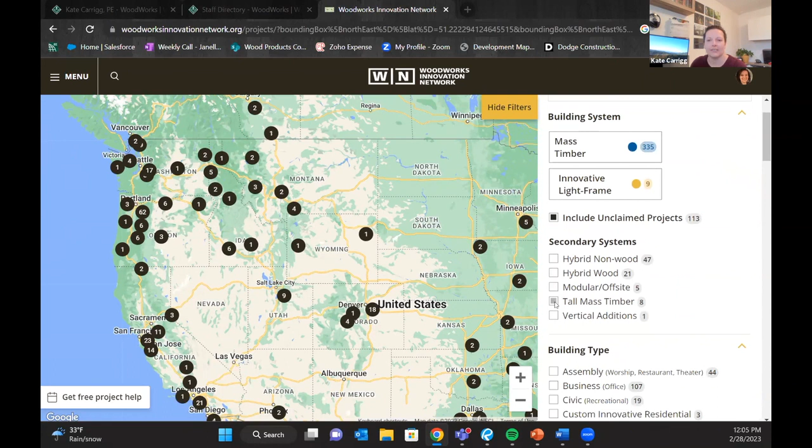You can actually filter this website by a bunch of different categories, including tall mass timber. And you can see where these projects are. You can access the projects by either clicking on the pins, or you can select them from the list. So today we will be talking about TimberView. You can find TimberView's projects. This is information that the team has compiled about this project on the WIN network.

And you can also find the team members themselves. If you want to look closer at the team, the members that are part of the WIN network have profiles and you can contact them directly. Because again, the point of this is to just foster networking within this community. So this is a really great tool if you're an experienced professional and you want to gain more exposure. And it's also great if you are new to mass timber or you're starting a mass timber project and you're trying to look for more information or to assemble a project team.

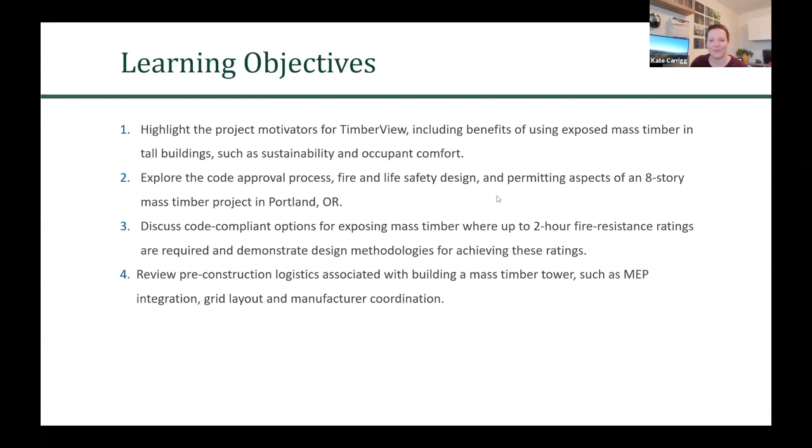I'm not going to read all of the learning objectives to you, but I'm happy to send you that information if you want it. We will be talking about prescriptive design, specifically the International Building Code, which is updated on a 3-year basis. We're currently in the 2021 IBC, and mass timber first occurred back in the 2015 IBC.

But back then it was only recognized as an acceptable product that you could use in any of the wood frame construction types that were in the code at the time. So we could only build about 4 or 5 stories, maybe 6, if you did everything right and had an occupancy that allowed for that.

Despite those limits, though, there was still a lot of interest in going taller back in 2015. We were seeing all these tall buildings appear over in Europe, overseas, and up in Canada. There was also a competition held by the USDA and Softwood Lumber Board here in the United States to help spur more research and more interest in these tall wood building types.

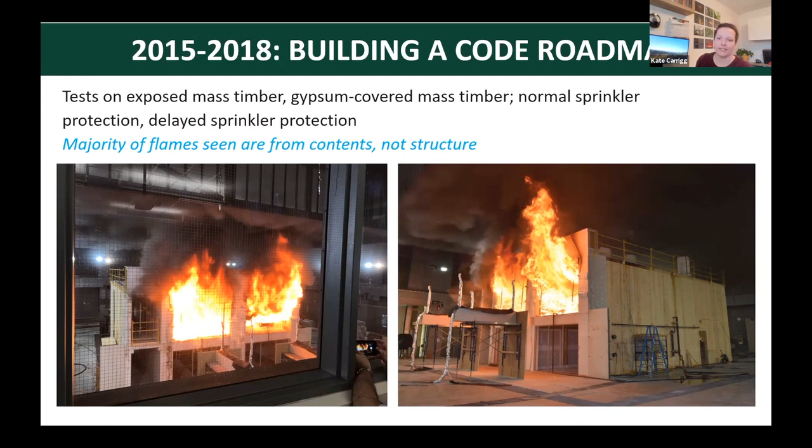They used the results of those tests, along with any other research done up to that point, to develop 3 new construction types. The main differences between these 3 new construction types are the fire resistance ratings required for structural members as well as non-structural members, and the amount of timber you're allowed to expose.

These are all mass timber buildings, ranging from 85 feet or 9 stories up to 270 feet or 18 stories tall for the tallest construction type, which is 4A construction. For C construction, you're allowed to fully expose all of the timber on your ceilings and walls. For A construction, everything has to be concealed.

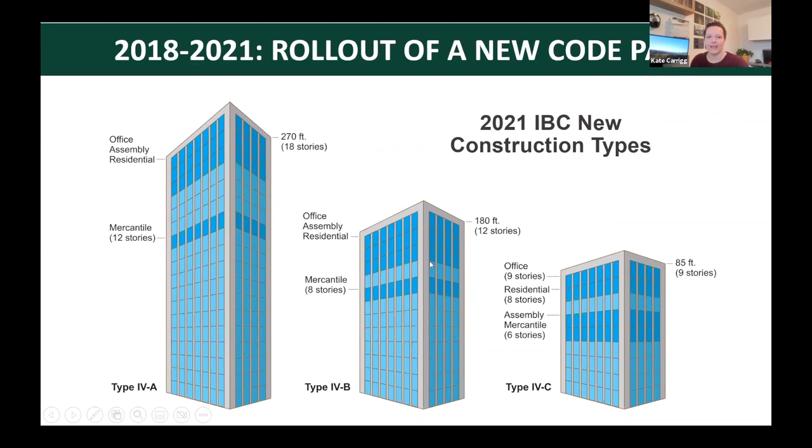B construction is a little unique because they have limits as to how much timber you're actually allowed to expose, shown here. It's pretty limited - you're only allowed to expose up to 20% of your surface on your ceiling or 40% of your wall surface.

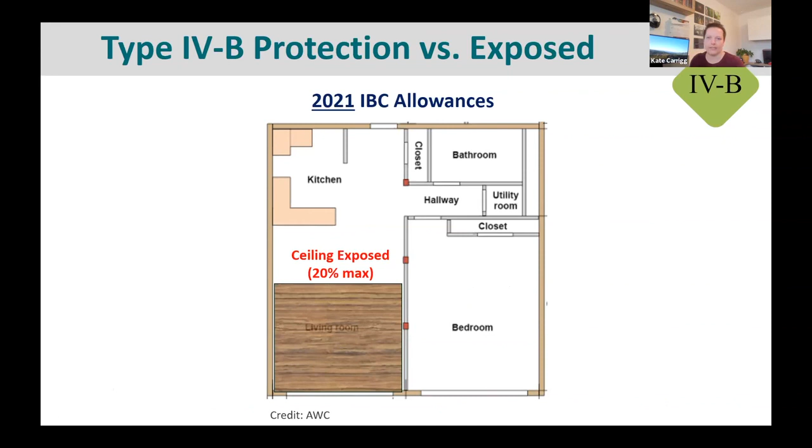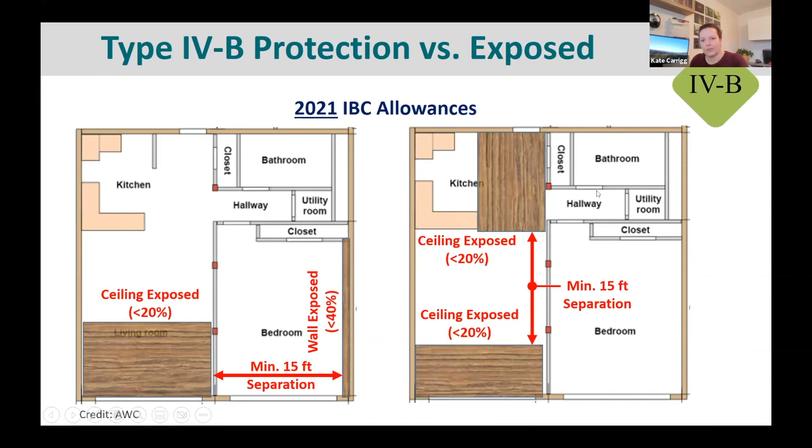And then you can do combinations of those. If you want to expose both, you have to trade off some of that area to expose your walls, and vice versa. If you expose multiple locations, you can still only add up to a total of 20% on the ceiling or 40% on your wall.

The reason for all of the protection on the ceiling is tied to a performance characteristic of our older version of CLT when it's applied in a horizontal application like in a ceiling. This is known as char fall off. It's something that occurs when your protective layer of char actually peels off the bottom of your ceiling during a fire, exposing a non-charred layer, which gives the fire an opportunity to start to regrow and eat up more fuel.

This was largely a function of adhesives and their performance under high temperatures, but through testing, they were able to generate new standards for adhesives used in CLT that could withstand these higher temperatures much better. We addressed this in the PRG 320 2018 version, and the 2021 IBC includes provisions that require you to conform to that standard.

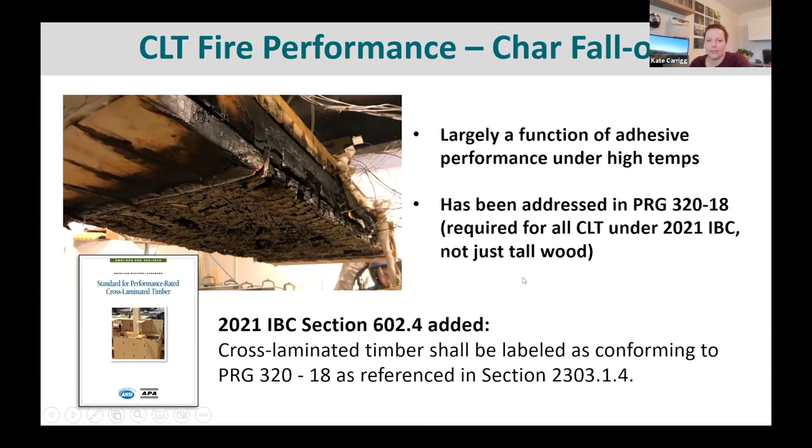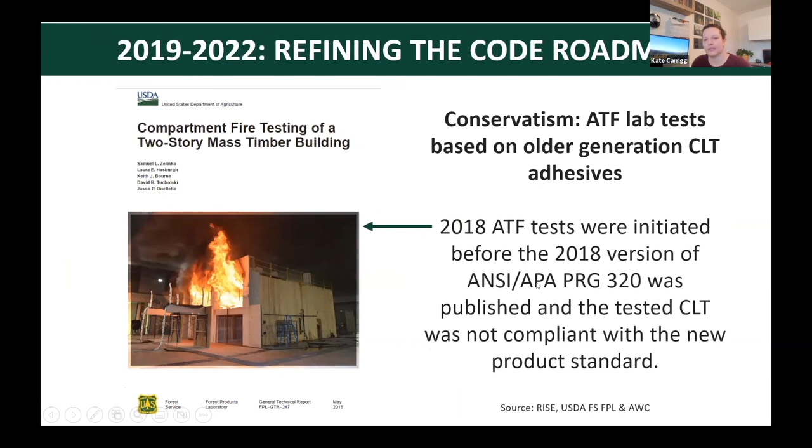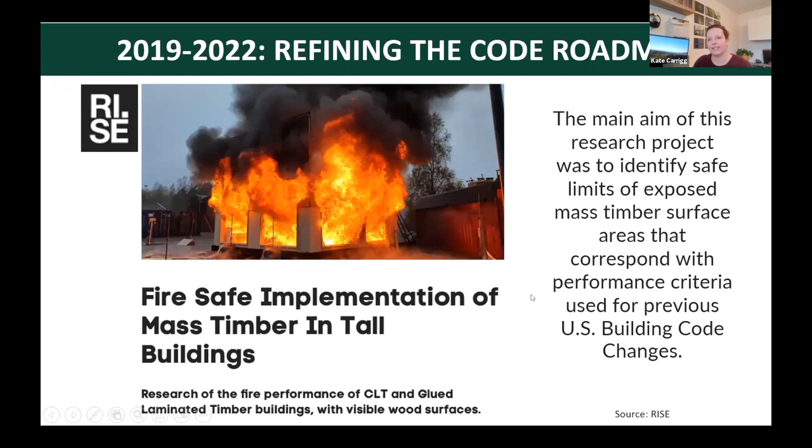However, the tests that the ad hoc committee performed were done on CLT fabricated using the older generation of adhesives. That's why there were so many limits on how much of the ceiling you could actually expose, but there was a lot of desire to expose more. Because we had updated the adhesive standards, the American Wood Council teamed up with a number of interested parties and performed new tests, again 5 full-scale tests, to see if we could increase that exposure limit.

So for the 2024 IBC, based on those new tests, you are allowed to expose up to 100% of the ceiling for type 4B construction, and you can trade off that exposure in order to expose some of your walls as well.

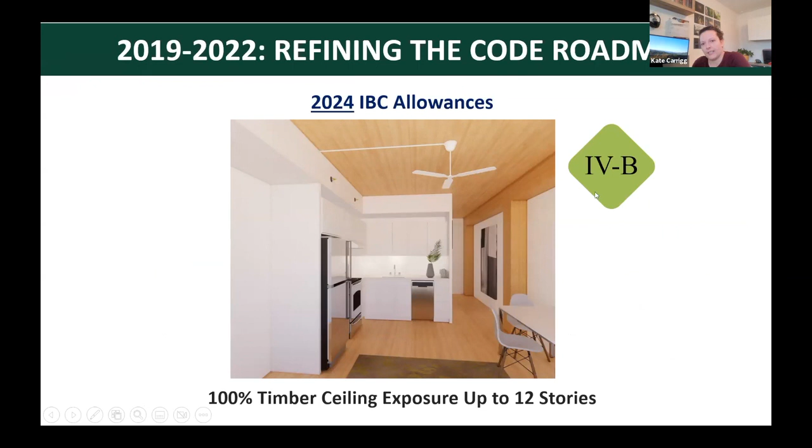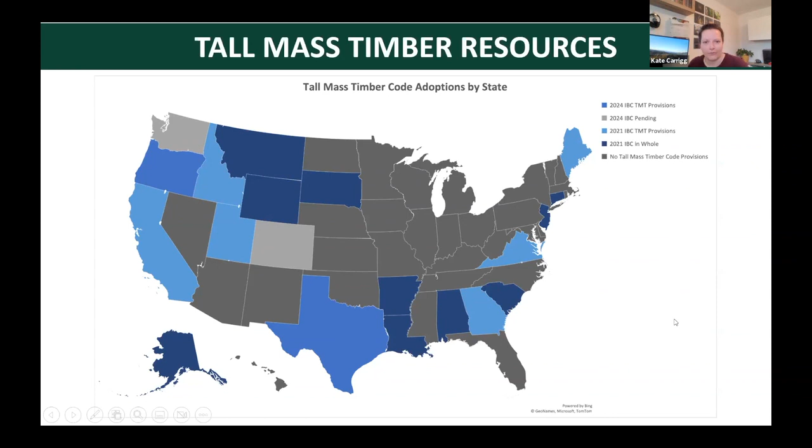Looking at who has actually adopted these codes across the country, Oregon is way ahead of the game. We have adopted the 2024 IBC provisions, so we are allowed to expose 100% of ceilings in our type 4B structures. Washington has also decided to do that, and theirs will go into effect in July of this year. Idaho and California have not adopted the 2024 provisions yet, but they have adopted all of the 2021 tall wood provisions. So as a whole, the West Coast and Pacific Northwest are way ahead of the game when it comes to these tall wood types.

Before we hand it over, I wanted to give you some fun statistics about where we are with tall wood construction. Mass timber in general, as of December of last year, we had over 1,600 projects that WoodWorks was aware of. 12% of these projects are tall mass timber projects.

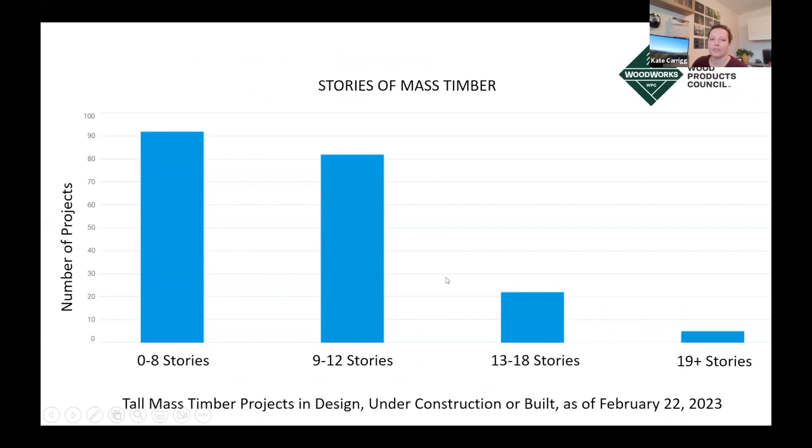44% of the tall mass timber projects started in 2022, and that's because of these new provisions. If you look at the actual heights of all these tall mass timber projects, 87% are 12 stories or less, and that's because people really want to expose that mass timber. It's one of the major market drivers for this construction type.

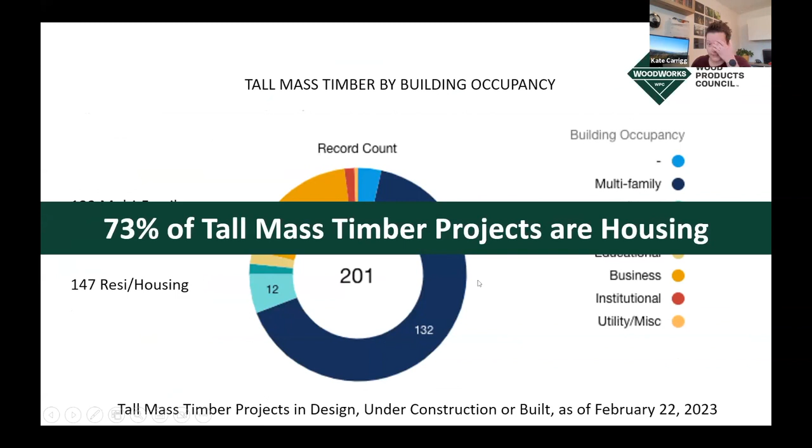Ascent in Milwaukee is the tallest mass timber building in the world. It's not based on these prescriptive types, but it's pretty cool to look at. It's 25 stories tall with 19 stories of mass timber. Intro was actually one of the first prescriptive building types, a type 4B building in Ohio. And on the West Coast, in addition to Carbon 12, we had 3 buildings back in November under construction.

So Heartwood, up in Seattle, Washington, which is a 4C, Minnesota Places, which is here in Portland, also a 4C, and then 1510 Webster down in California, which I believe is a 4A.

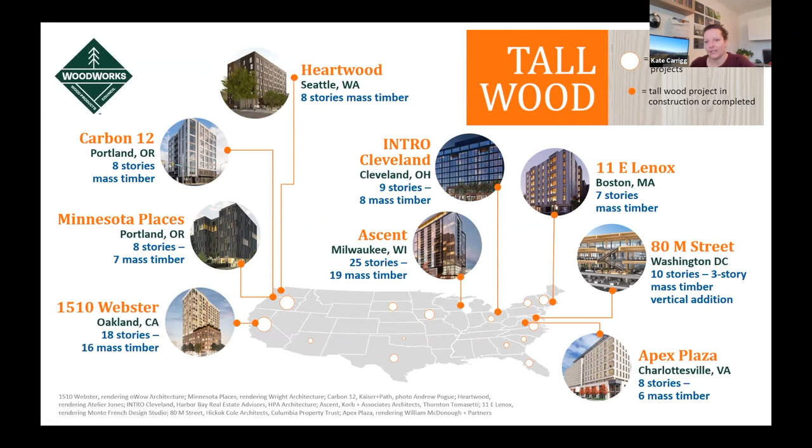And we have members of all of these teams on the call today, or at least people were invited. So pretty exciting. And then the other exciting news is that we get to update this map with a few new projects, including Timberview. So with that, I'm going to hand it over to the Timberview team to actually present on their project.

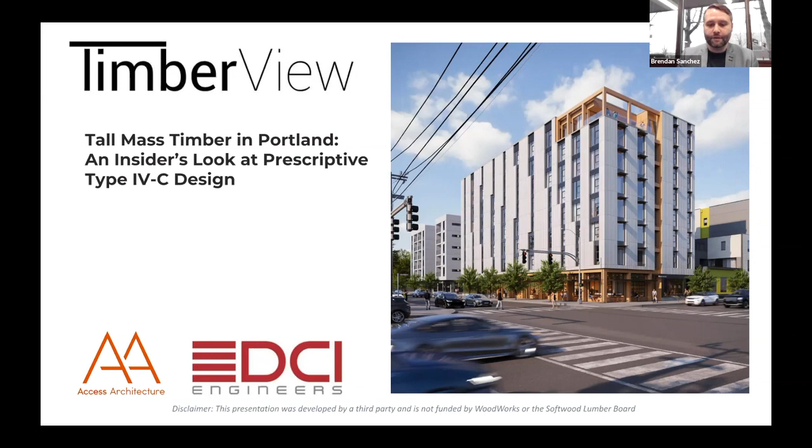So here are the presenters we have today. In addition to myself, we've got David Burnett from our office, who's been the project architect and really doing the heavy lifting on the design side, on the architectural side for us. And then we've got DCI engineers, Shirley, Justin, and Kevin, who've been just really integral to this project and a really good resource for us to lean on as we have taken on our first mass timber project.

Just real quick about our firm. We're fairly new. We're in our 5th year, so still kind of an emerging firm, but we bring staff with a lot of expertise in multifamily and commercial. We have a wide range of project typologies, but our mission really is around designing connected communities. So we're kind of a mission-based firm and try to imbue those values in every project that we do, Timberview included. This is our small but mighty firm.

All right, I'm going to pass it off to David to go over an overview of the Timberview project and some of the specific challenges and opportunities and lessons learned that we've come across so far. Thank you, Brendan. Now that you have met the team behind it, I want to introduce you all to the Timberview project itself.

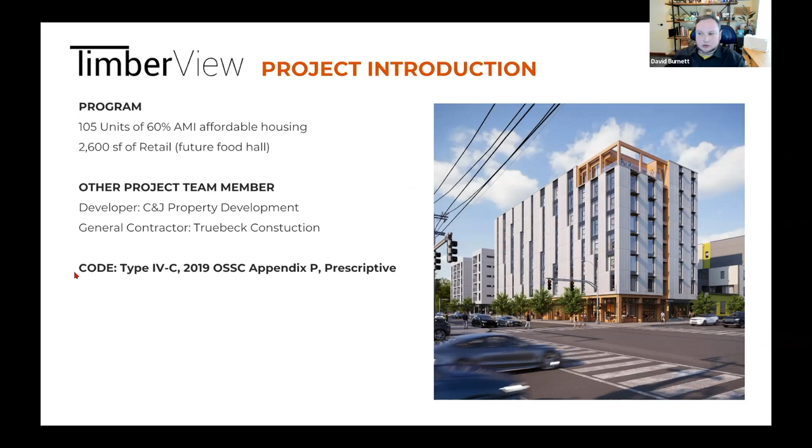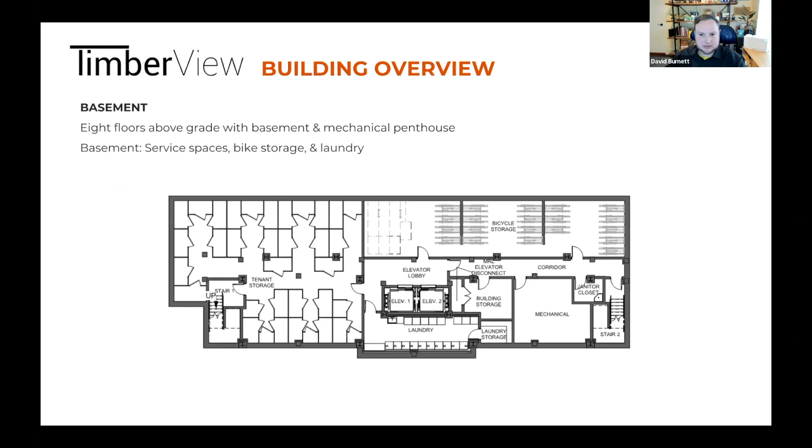Timberview is 8 stories above grade with a basement and mechanical penthouse. This is the basement floor plan with laundry, bike, and tenant storages and service spaces. On the ground floor, we have the retail space in the southwest corner, which is upper left on the page. This faces the intersection of 99th and Glisan. The TI space will be developed as a food hall with 4 food vendors and a bar. Additionally, the ground floor has entry lobby, offices, some amenity spaces, and back of house elements.

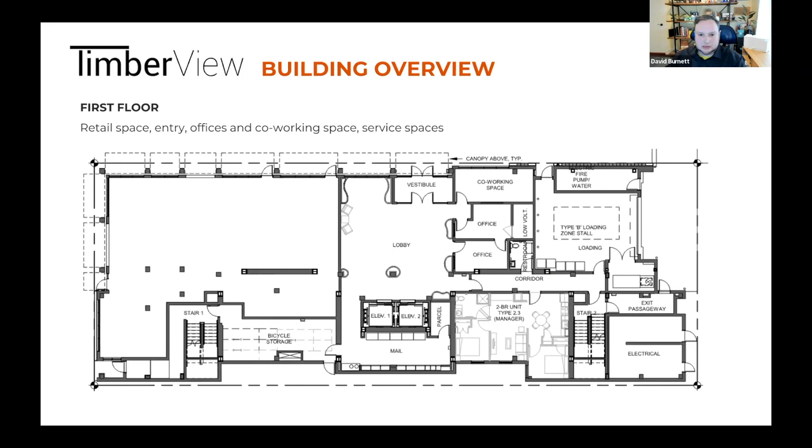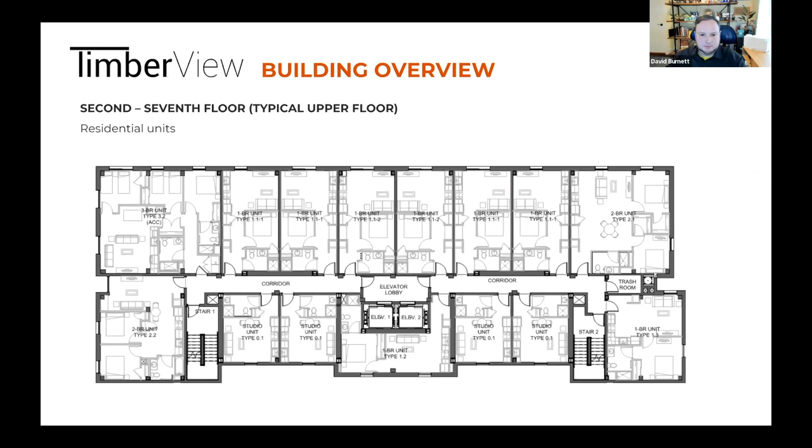The upper floors house the residential units ranging from studios to 1, 2, and 3 bedroom units. The studios and 1 bedroom units are contained within 1 structural bay, whereas the larger units span multiple bays. As you can see, we opted to align the structural grid off the demising walls to better allow for plumbing stacks to run through them. The top floor is similar to the typical floor, except for the addition of the community room and deck with views of Mount Tabor and even downtown Portland in the distance. I'll pass it off to Shirley to introduce the structural system.

Sorry about that slight glitch on the technology.

Hi, my name is Shirley Chalupa. I am principal at DCI Engineers. I would like to do a short intro to DCI. We are a structural and civil engineering service company, and we have 17 offices throughout the United States. I'm managing principal at the Portland office, and we have been in Portland for over 28 years. And we have also done 80 mass timber projects throughout the United States.

So with that, I would like to go back to how the project was originally conceived. It was longer than 4 years ago when the owner reached out to me about their desire to help solve the Portland housing crisis. That was one of their original goals, but also they're very passionate about sustainability and how to achieve design using sustainable materials. They also shared some of their concerns, especially construction affordability. It's important to make sure that we come up with a system that makes sense, actually works, and is also affordable. Speed to market is also desired, especially due to the housing needs in Portland.

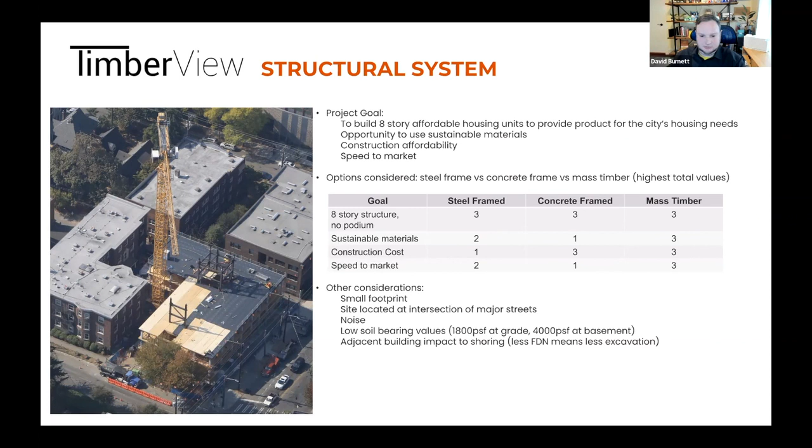Now I'd like to discuss some architectural items relating to mass timber that came up during design, permitting, and construction that should be planned for as soon as possible. Type 4C allows full exposure of wood structure. However, that may not be the most cost-effective approach, as it often requires upsizing the members to account for a 2-hour sacrificial char layer. Early in the design, it was determined that for our project, it was more cost-effective to provide 3 layers of gypsum wallboard, wrapping the columns and beams, than to upsize them to account for the char layer. A determination that could easily vary between projects, material, and labor markets.

We optimized the use of the exposed structure and its aesthetic by highlighting the beams and columns at communal spaces and when the structure is within the unit, and not when it is tucked near the periphery walls, where we opted to cover them.

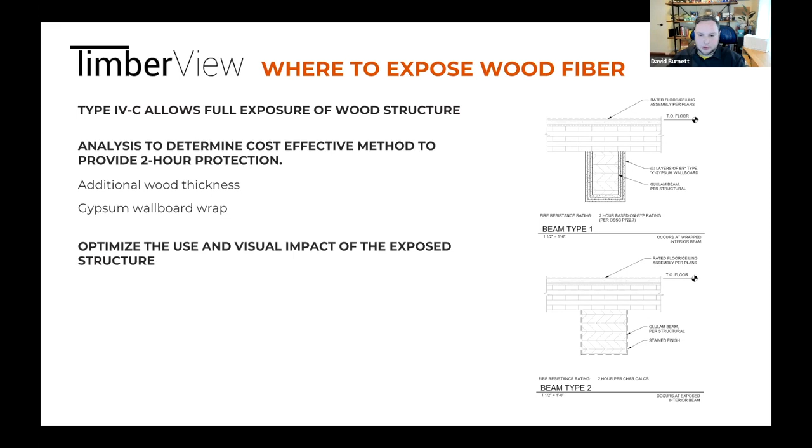Code requirements determine some maximums and minimums for the height of timber. Type 4C allows for the highest roof surface to be 85 feet, whereas a mid-rise structure is limited to 75 feet to the highest occupied floor. This, in addition to some zoning stipulations, gave us a floor-to-floor height of 9 foot 10 inches to work with. This results in maximum beam depth ranging from 1 foot 7 inches to 2 foot 1 inches, typically fine for many construction types, but glulam beams with a sacrificial char layer can readily exceed that depth.

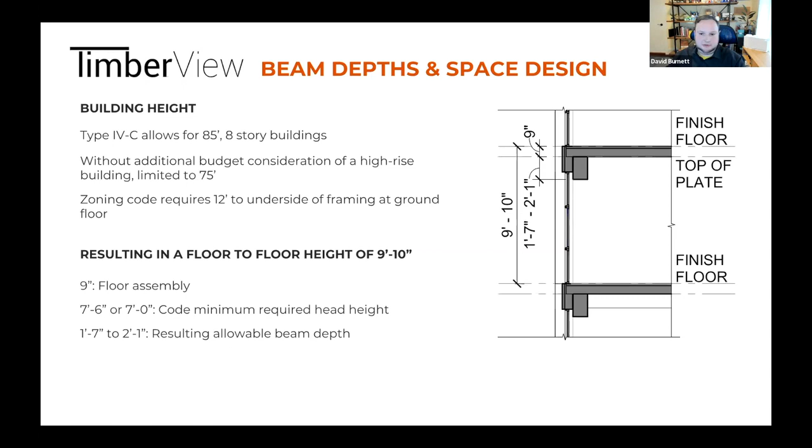Compound that with needing mechanical venting to cross structural bays, head clearance is something that requires careful consideration and design effort in mass timber construction. Of course, there are ways to alleviate these concerns, but they need to be integrated in the design very early in the project, such as utilizing the 2-way spanning capability of CLT and allowing to remove the beams entirely, reducing beam spans and therefore depth, exploring high-rise and type 4B construction types, or using an alternate beam system entirely, for example, steel.

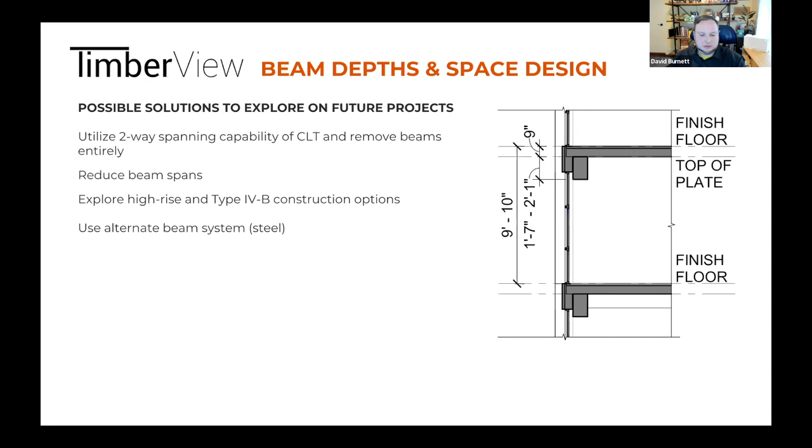Because glulam beams and columns provide all of the structure, the exterior and interior walls need to allow for deflection. On this project, the worst case condition is plus or minus 1 inch deflection for a total 2 inches of travel. Unlike many other construction types, rated walls join directly to the exposed structure of the CLT decking while needing to maintain that fire rating. Wall-ceiling intersections cannot be concealed or covered in gypsum wallboard or a drop ceiling, as is common in other construction. Therefore, careful detailing and innovative products are needed to deal with these conditions at the interior and exterior.

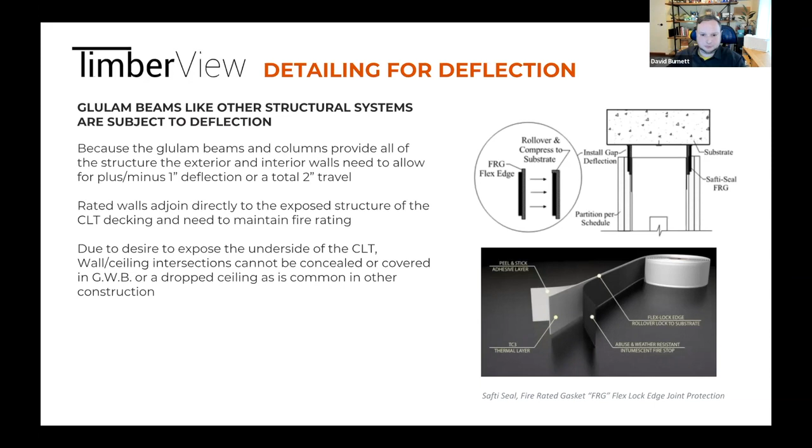Mass timber design is rapidly evolving. Despite the project falling under prescriptive code path, the code, engineering, and jurisdictional viewpoints progressed as the project underwent design development, construction documents, and permitting.

For example, we chose the structural hanger supplier early in the project because that manufacturer had the most complete available documentation at the time. During permit review, the AHJ determined the documentation insufficient. By that time, another manufacturer had more complete documentation. We could either redesign the structural system with the new hangers or work with the previous manufacturer to provide an engineering judgment that would appease the AHJ.

The DCI team will go into another example in more detail later. However, to briefly state it here, the project aimed for prescriptive path with no need to file appeals. The novelty of this construction type and the reviewers being unfamiliar with the intricacies of maintaining fire rating at numerous connection types resulted in us filing for an appeal for fire rated protection at connections. The AHJ did not have a path that would allow for us to proceed 100% prescriptively due to the gray area within the code and reports.

As one last example that I will discuss here, being a residential project, floor ceiling assemblies are required to have minimum sound performance rating. During initial design, we contracted a sound engineer to provide a viable assembly meeting the code requirements and project needs. During bidding, it was determined that an alternate assembly would be required as the gypsum underlayment manufacturer would no longer warranty their part of the assembly, as increased thickness of their product was needed to avoid cracking over CLT construction.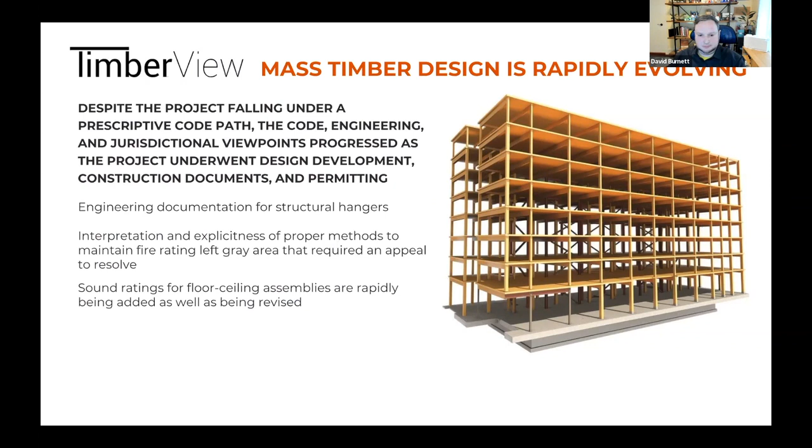Furthermore, additional testing by another manufacturer also showed prior lab testing, from which our sound engineer started as basis for his design, was redone in August of last year and showed the initial tests were overly generous. A new assembly had to be found, but within the depth and weight restrictions already designed into the project. And with that, I will pass it off to the DCI team to discuss some structural considerations.

Thanks, David. I'm Justin from DCI Engineers, Structural Project Manager. If you want to move on to the next slide, I'll talk about the gravity system.

So gravity system for the Timberview project, starting with the floor assembly, we had a 5-ply 6 7/8 inch thick E1 grade CLT floor system with a V1 grade at the roof. We have a 1.5 inch thick gypcrete topping over the CLT. And then at the ground floor, we have a mild reinforced concrete slab, which is over the basement area. We also have slab on grade adjacent to the basement at grade.

The CLT is supported on a series of glulam beams that clear span across the double loaded corridor, so interior corridor wall to exterior wall. Those glulam beams are approximately 16 to 18 feet on center, essentially aligned with the demising walls of the units. Typical sizing for those is 8 3/4 inch width and approximately 25.5 inch deep. They utilize Ricon concealed hangers as the typical connection of varying sizes.

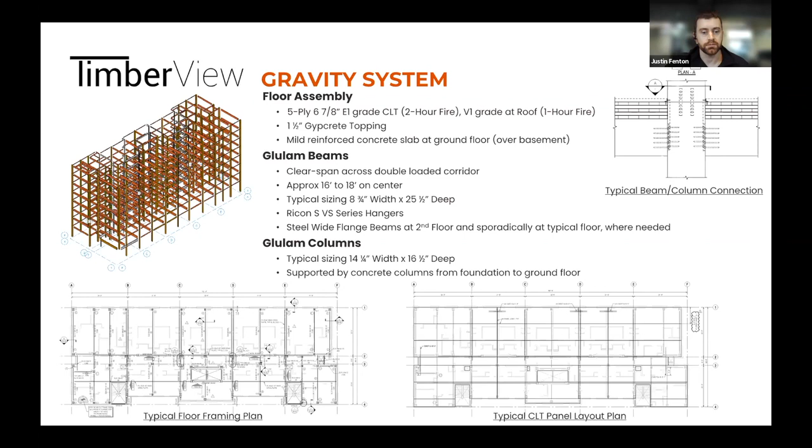All right, great. Thanks, Justin. So in mass timber construction, there's an inherent relationship between fire rating and the structural design. So for type 4C construction, the beams, columns, and panels are all 2-hour rated. And this rating was achieved with 2 methods on this project. The first of which is gypsum protection, where 3 layers of 5/8" gypboard, each providing 40 minutes of protection, are used. And this is part of the prescriptive provisions in the 2021 IBC.

The second method used was char of the exposed mass timber, and this is prescribed as a calculated method in the NDS, which is the wood design code. So beams and columns used a combination of both these methods based on the needs of the project, kind of like what David touched on earlier. And the 5-ply CLT panels achieved their rating solely from char, which allowed for exposed CLT ceilings throughout the project.

So for connections, as mentioned earlier, the Ricon concealed hangers were used for all beam to column connections. The diagram on the bottom left corner shows an example of this detail.

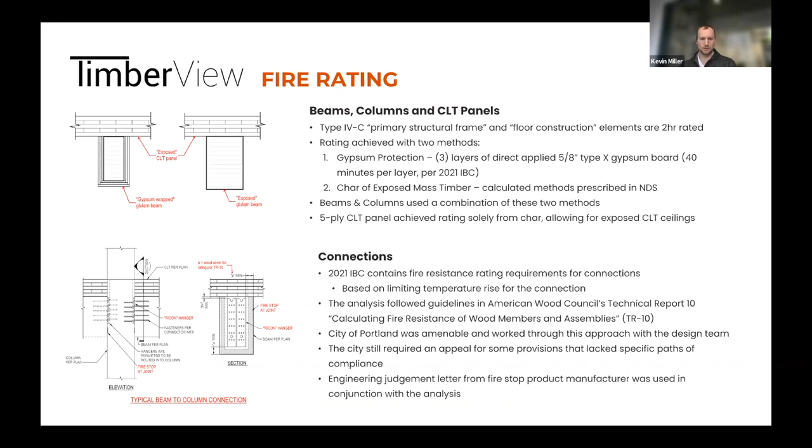Next slide, David. Thank you. So a little bit about the lateral system of the building.

Portland being a high seismic region, seismic design requirements typically govern the selection of the system. For an 8-story building, which is on the taller side, current code-prescribed systems are either steel or concrete based, for example a steel brace frame or a concrete shear wall. Buckling restrained brace frames were selected for a variety of benefits, mainly their high ductility, flexibility in system layout, and speed of construction, specifically compared to a concrete shear wall system.

For the structural diaphragm, the CLT panels themselves were designed as the structural diaphragm, meaning an additional structural concrete topping slab wasn't required.

CLT diaphragm design provisions are relatively new and are part of the 2021 Wood Lateral code, which is adopted as a reference standard in the 2021 IBC. Technically it wasn't adopted by the city of Portland at the time, but they allowed the use of these provisions. Other elements that are part of the CLT diaphragm system are flat steel plates and light gauge steel straps for elements such as chords, collectors, and panel splines. All of these elements can be concealed in the non-structural gypcrete topping.